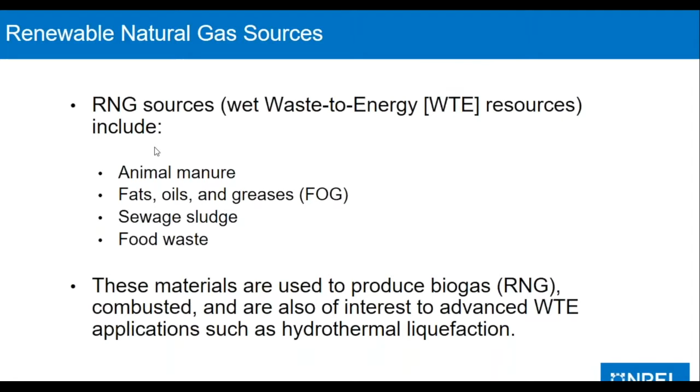We estimate that wet waste energy resources have the equivalent energy content of about 1 quad or 7 billion diesel gallon equivalent per year. Please note that this estimate is based on energy content alone and does not account for conversion efficiencies or losses during a particular conversion process. This resource potential accounts for about 18% of U.S. on-highway diesel consumption in 2016, namely freight transportation. Diesel is also used in other sectors such as railroad, farm equipment, and other off-road applications, but this number applies to on-highway diesel consumption only.

Less than 2% of the estimated resource potential is currently used for RNG production, as shown in the graph here, which illustrates the RNG production during the past 7 years. The sharp increase in RNG production in 2014 is due to biogas pathways qualifying as advanced and cellulosic biofuel under RFS, namely D3 and D5 RIN credits, which trade at much higher market values than other types of RINs.

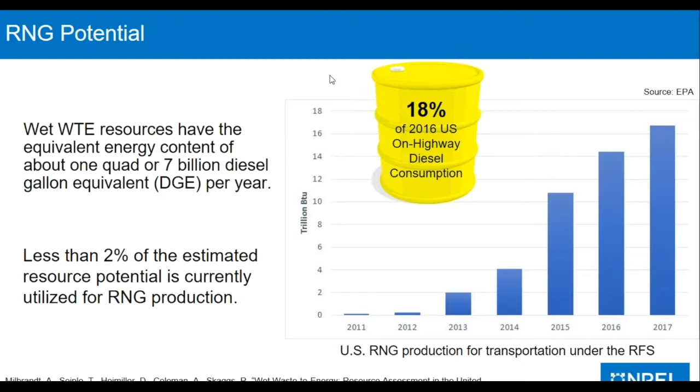Thank you. With respect to RNG feedstock prices, we developed a model that generates what we call supply curves by state, and the supply curve is a function of resource quantity and resource cost. The model also maps the resource prices by county or on location. The model inputs include parameters such as resource quantity, collection costs if applicable, processing costs such as dewatering and storage, namely applicable to sewage sludge and manure, and depackaging, which is more applicable to food waste. We also consider disposal costs and method. In the cost specifically, we include the landfill tipping fees and so forth.

Some of the highlights for this ongoing, almost completed work is that wet waste to energy feedstocks exhibit different prices across geographic areas. This again is no surprise, as there are a lot of variances in labor cost, fuel cost, and so forth between different markets. Feedstock can be treated as commodities or waste depending on location and markets. For example, most fats, oils and greases are treated as commodities. Manure could also be a commodity in certain areas, namely used as fertilizer, while sludge and food waste, for the most part, are considered waste material.

These organics collection programs aggregate food waste from its point sources. Therefore, the feedstock is already separated, which avoids additional cost and keeps the prices low. Again, more information on this work will be available in a forthcoming publication. Next slide, please.

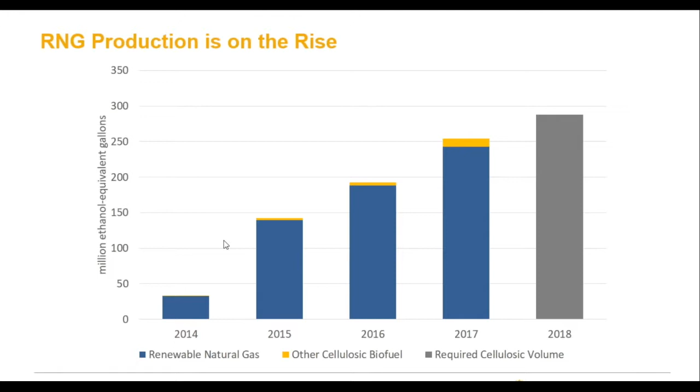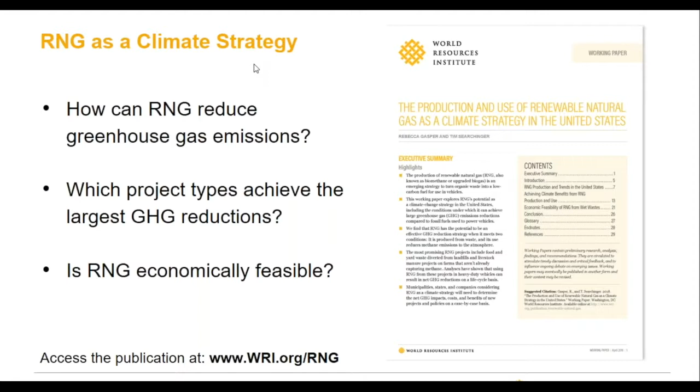So our paper looked at several questions, including the 3 listed here. How and under what conditions can RNG reduce GHG emissions compared to fossil fuels used in vehicles? Which RNG project types or feedstock types can achieve the largest reductions? And is RNG economically feasible in terms of its production costs, incentives, and payback periods anticipated by projects on the ground? So today I'll focus on key findings related to these 3 questions, but our paper also does cover additional topics, including more details on trends and market opportunities.

So these are our 3 key findings, and I'll talk about each one in more detail. First, RNG can significantly reduce emissions compared to fossil fuels when it meets the 2 conditions listed here. It's made from waste, and its production captures methane that would otherwise be emitted to the atmosphere. Second, RNG made from food and yard waste and manure projects in particular can deliver the largest reductions. And third, RNG projects are economically feasible from what we've seen so far on the ground. In some cases, they're cost effective in 5 years or fewer, but barriers do exist that might inhibit more widespread production.

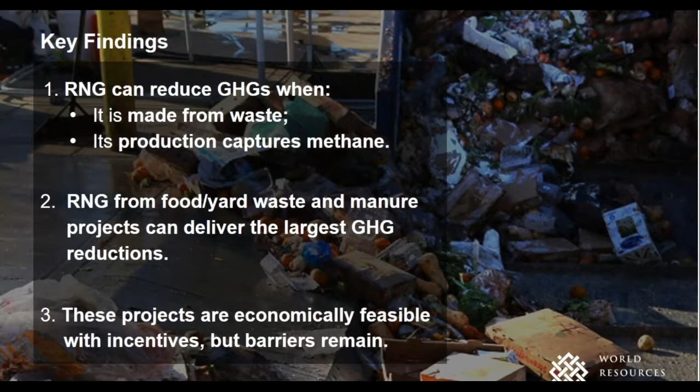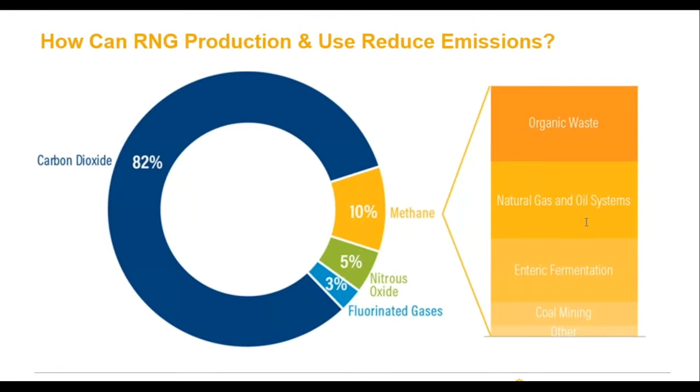So how can RNG reduce emissions? One of the biggest potential climate benefits of RNG is that its production in some cases can prevent emissions of methane. As Nicholas said, methane has 28 times the global warming potential of carbon dioxide. And the wet organic waste sources that Anelia described in her presentation contribute about 30% of all US methane emissions as they decompose in their typical management. And that's represented by the organic waste category on the bar portion of the chart here, which includes methane emissions from landfills, livestock manure management, and wastewater treatment. When wet wastes are used to make RNG instead, those methane emissions can be captured and used as an energy source, and we'll go into how that happens on the next couple slides.

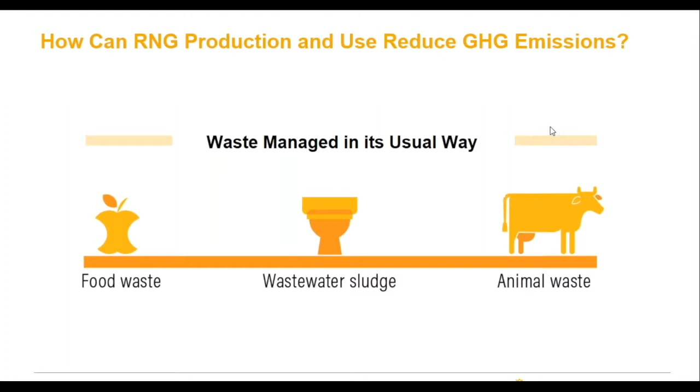So this diagram is going to have 2 parts. The first panel here represents emissions that would otherwise occur from waste managed in its usual way and can be avoided due to RNG production. And this might be food waste or sludge disposed in landfills, or livestock manure stored in an open lagoon as 2 examples. Next slide. This panel represents the RNG vehicle fuel supply chain where wet wastes are used to produce RNG instead. So starting on the left, organic wastes are collected and transported in some cases, placed in an anaerobic digester where they decompose. And as they break down, they produce biogas, which is a mix of methane, carbon dioxide, and some other trace components. This biogas is then refined into essentially pure methane, at which point it's commonly referred to as RNG.

And I should also mention that anaerobic digestion also occurs in landfills when organic wastes are disposed there, and that forms a type of biogas usually referred to as landfill gas. And a gas collection system can be installed at landfills to capture that gas, which can then be refined into RNG, just like biogas from a digester. And once biogas has been refined into methane, the product is nearly identical to conventional natural gas and can be used in the same ways. So as a vehicle fuel, it gets compressed or liquefied, transported by pipeline or truck, dispensed at fueling stations, and then it can be used in a vehicle with a natural gas engine. RNG is mostly used in heavy-duty vehicles, so the fuel being replaced or displaced by RNG is typically either conventional natural gas or diesel fuel.

And there are 3 buckets of GHG emissions that occur throughout this life cycle. One is energy used to produce and transport the gas. Second, leaks of methane that can occur at any step in the supply chain, including from compressors and pipelines, fueling stations, and from the vehicle itself. And third, combustion of the fuel in the vehicle, which produces mainly carbon dioxide like conventional natural gas. So to figure out the life cycle GHG impact of RNG from any given project or pathway, you would add up all the emissions it generates over its life cycle from those 3 buckets, and you'd subtract avoided emissions from waste management and any other avoided sources of emissions.

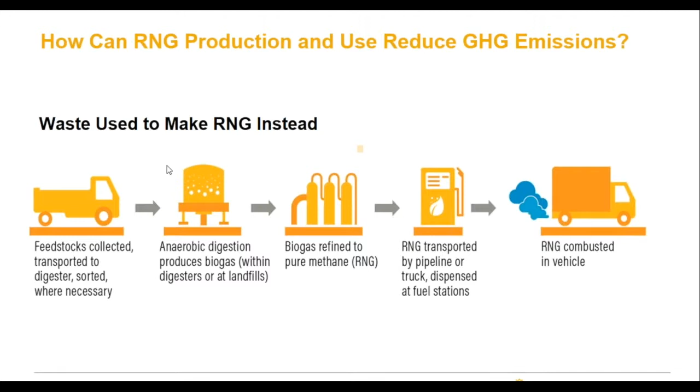And when those avoided emissions are taken into account, RNG's life cycle carbon footprint can be much lower than conventional natural gas or diesel. Now, that might not always be the case. It depends on the specifics of any given pathway. But RNG is most likely to have a very low carbon footprint on a life cycle basis when it is made from waste and when it captures methane that would otherwise be released. So when RNG is made from waste rather than dedicated uses of land, for example, growing crops to make RNG, it avoids land use competition with food, timber production, and ecosystems, and the GHG emissions and loss of carbon storage opportunities that can go along with that.

And paying close attention to the net effect on methane is important because in some contexts, new RNG projects could actually increase methane emissions. And for wet waste, this mainly comes into play if the methane being produced is already being captured and either used or flared as part of its management, which is the case at many landfills, for example. Flaring converts most of the methane to carbon dioxide before it enters the atmosphere. So if methane that would otherwise be flared is used for RNG instead, any leaks that occur from when the gas is produced to when it's combusted in the vehicle could actually be new additions of methane to the atmosphere.

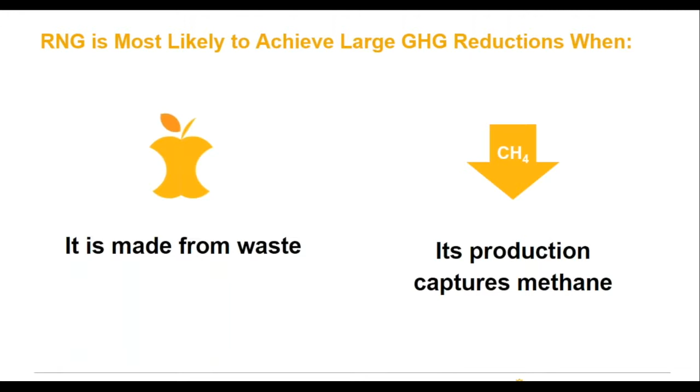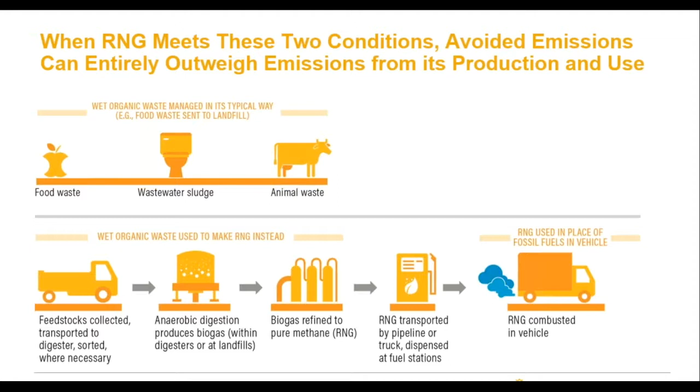So this slide shows which types of RNG projects can meet these conditions, and you'll see that most of the wet waste Anelia described could potentially meet them, but it depends on how they're managed. So generally this includes food scraps, yard trimmings, or other organic waste diverted from landfill disposal, livestock manure where methane is currently uncontrolled, sludge at wastewater treatment facilities that aren't already using anaerobic digestion to treat waste and then flaring or using the methane, and landfill gas at landfills that aren't capturing methane, or where developing a new RNG project could significantly increase the amount of methane that's collected.

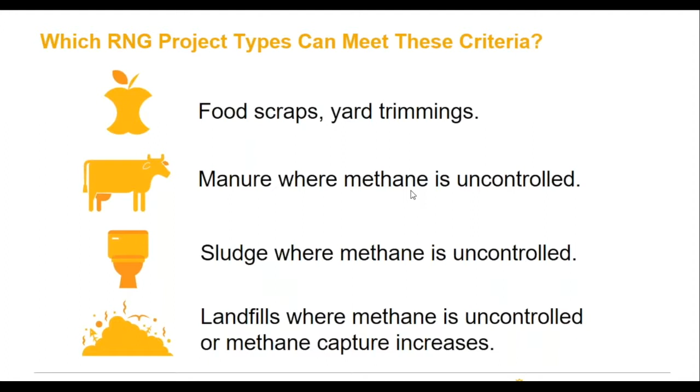So landfill gas collection systems tend to be inefficient and allow 15 to 25% of the gas to escape. So if an RNG project provides incentive for a landfill operator to invest in new technology or new operations that can tighten up that efficiency, it could potentially lead to net methane emissions reductions. And of these 4 categories, RNG from food and yard waste diverted from landfills and livestock manure projects are especially promising in terms of the GHG reductions they can provide compared to fossil fuels and other alternative fuels.

So this chart shows certified life cycle carbon intensities under California's low carbon fuel standard in terms of grams CO2 equivalent emitted per megajoule, which is the value on the horizontal axis. And the bars represent the range of carbon intensity pathways certified within each fuel category. And that dark vertical line is set at the carbon intensity of diesel fuel, just for reference. So any bars to the left of that are less carbon intensive than diesel.

And you can see that RNG from dairy manure and food and yard waste, which are labeled in blue, have the lowest carbon intensity of any alternative fuel under the program, including grid and solar electricity and including hydrogen from various pathways as well. And they both actually have negative estimated carbon intensities, which reflects the statement I made earlier that avoided emissions from making RNG from these wastes in this category actually outweigh the emissions from production and use.

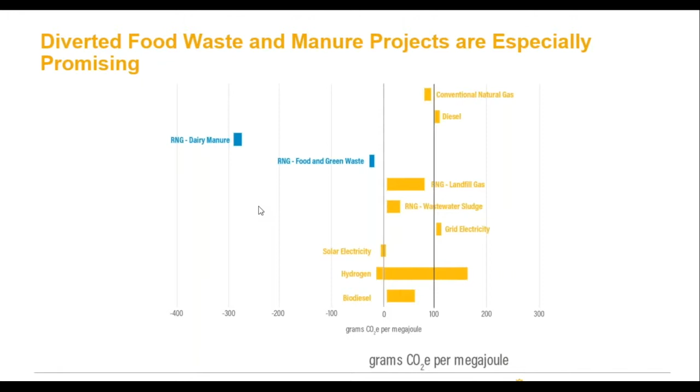And I would just note that these estimates are based on a model with a number of underlying assumptions, and the carbon intensity that comes out of that model is sensitive to some of them. And so we try to compile those in our working paper. And just one last thing I'll mention on food waste is that using food waste for fuel can come after implementing other measures to reduce the amount of food that gets sent for disposal in the first place. And WRI is also doing a lot of work on this, and you can find that by looking for food loss and waste on our website.

And we're seeing that RNG projects can be economically viable. They're up and running successfully at sites around the country. The organization Energy Vision has some really great project profiles if you check out their website. I'm just going to give two examples. In Ohio, the city of Columbus partnered with a private fuel producer on a large digester project that takes food and beverage waste, fats, oil, and grease, and other wet waste from the region that would otherwise be incinerated or end up in landfills, and they use it to produce both electricity and renewable natural gas. And that project has an expected payback period of just 4 years.

And they also use a solid byproduct of anaerobic digestion to make fertilizer for the farm. So this is a closed loop type of model that's typical of many RNG projects. And the costs of that project were reported at $18.5 million with an estimated payback period of about 10 years.

So we're seeing some really exciting examples like this, but challenges do remain that could inhibit RNG production from scaling up, including in those two more promising segments that we mentioned. So upfront costs and financing can be difficult. I just gave an example of capital costs of nearly $20 million, and that's not unusual. There's not a lot of data on this, but capital cost estimates range from the millions to tens of millions of dollars. And total production costs can be anywhere from $3 to $30 per MMBTU.

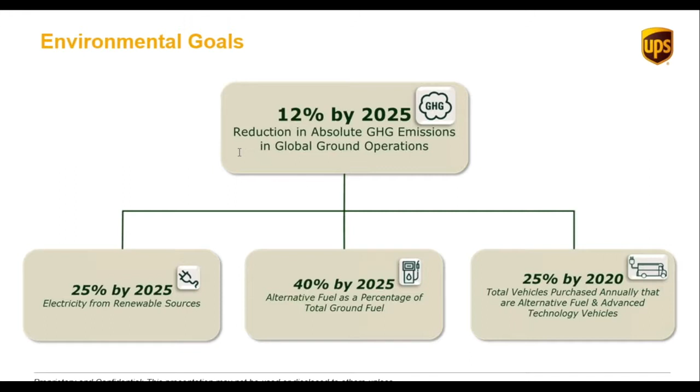As a leading global logistics company, we have a sense of responsibility to leverage our expertise, our scope, our scale, to explore and test the viability of new technologies. We do this by operating what we call our rolling laboratory. Through this rolling laboratory, we're able to evaluate a diverse range of existing and emerging technologies in real-world operating conditions.

For more than 3 decades, we've been exploring the use of alternative fuel and advanced technology vehicles to conserve fuel and to reduce emissions. And because our global service area comprises diverse terrains and delivery conditions, we can determine how these alternative fuels and advanced technologies perform in real-world operating conditions. This diverse fleet of specialized vehicles drives more than 1 million miles each and every business day.

This real-time, on-the-road approach means that we can, 1, test new technologies and advancements on a commercial-level scale, 2, work with our manufacturers to help them improve vehicle performance, 3, adapt our findings to place the right type of vehicle in the right place, the right geography, for maximum efficiency, and then 4, quickly deploy viable options at scale. Our fleet now comprises 9,100 alternative fuel and advanced technology vehicles.

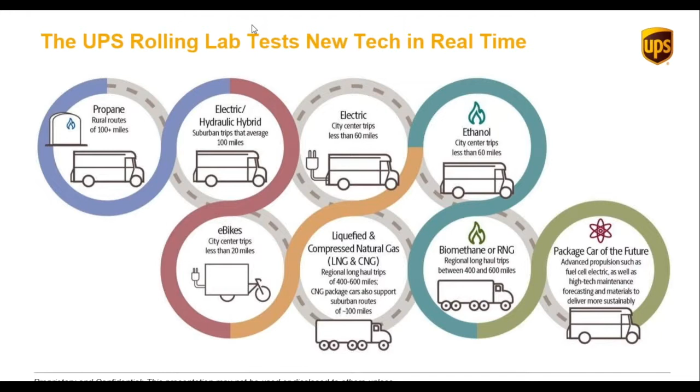These include compressed natural gas, liquefied natural gas, propane, full electric, electric hybrid, hydraulic hybrid, and ethanol. But as mentioned earlier by Rebecca, the only viable alternative to the Class 8 diesel tractor today is natural gas. Next.

Since 2009, UPS has invested more than $750 million in natural gas vehicles and fueling infrastructure. It's important to note that we make significant long-term investments that include a wide array of fuel types: nat gas, electric, propane, traditional biofuels, and advanced synthetic fuels. We engage with suppliers and agencies at the federal, state, and local level to help remove those barriers and adopt some common sense approaches to really increase the adoption of these fuels.

We're proving that there are alternatives to petroleum that actually work in real-world settings. And we are providing an alternative energy ecosystem that supports the commercialization of these alternative fuels at scale, and this specifically includes the use of RNG. In 2017, we used 77 million gallons of nat gas in our fleet. Of that, 62 million gallons was brown fossil nat gas, and 15 million gallons was RNG, renewable natural gas. So you can see we still have opportunities.

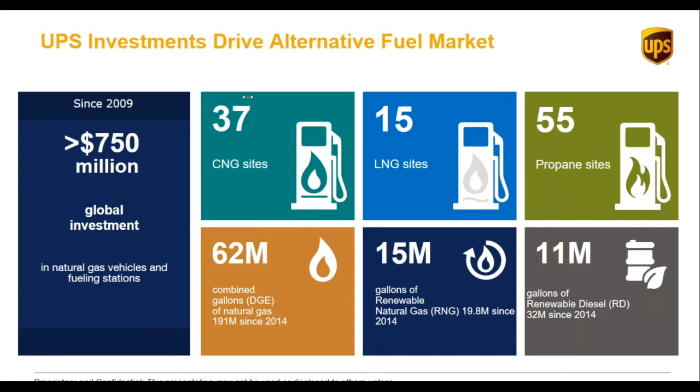Late last year, we also announced an agreement with Big Ox Energy to purchase an additional 10 million gallons of RNG each year. So we're projected in 2018 to be close to 25 million gallons of RNG use in our fleet. Next.

In order to support our expanding nat gas fleet, we continue to invest in refueling infrastructure. We at UPS build our own infrastructure to provide natural gas fuel to our fleet. This slide highlights the status of our current fueling stations. We also have several other CNG fueling stations not depicted on this slide that will be coming online in 2018 and 2019.

One thing to note is our Class 8 tractor fleet here in the U.S.: over 7 million miles each week is driven by natural gas tractors, and another 15 million is still driven by conventional diesel. So you can see that we're already over 1/3 of the miles and fuel used in our Class 8 fleet moving towards nat gas.